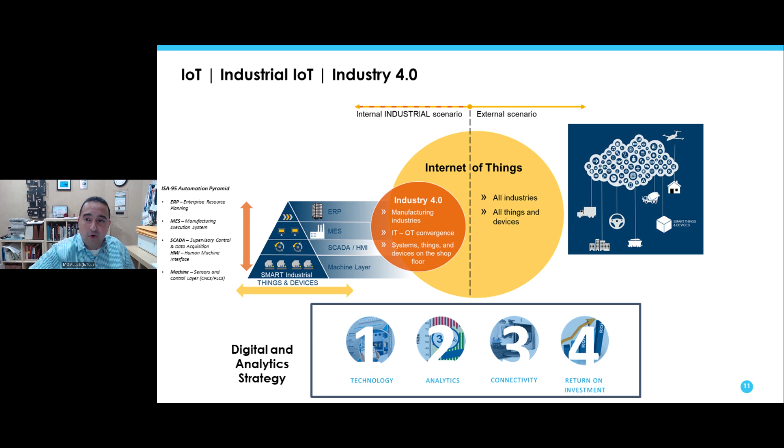And this all requires, number 3, connectivity. How do I capture real-time data, and how do I integrate data from the shop floor to the top floor of that pyramid, the automation pyramid that you see right there? And it all boils down to, what is the business case? One of the biggest challenges of implementing AI and predictive analytics, and to be honest, any IoT type of solution, is establishing a solid business case and delivering that business case in a short period of time. And therefore, I'd like to start setting the stage by talking about the business case.

The vision here is using those tools to drive toward a more zero downtime, near zero defects mode of manufacturing. So in order to do so, we have to define realistic KPIs, realistic key performance indicators. One of those key metrics used in manufacturing today is OEE, which is the overall equipment effectiveness of the plant. Some of the improvements you see here are actually manufacturing clients that have embraced Industry 4.0, embraced predictive analytics, and were able to make substantial improvements to their business. Clients are seeing improvements within a short period of time and achieving a very strong return on investment.

But if we look specifically at predictive maintenance right there in the middle, because that is a key use case we're going to discuss today, predictive maintenance is there to support organizations to move away from a fail and fix preventative mode of doing maintenance to a more predictive and prescriptive mode of doing maintenance.

And you can run predictive maintenance solutions as standalone solutions, or you can tie them with existing systems that you have in the plant. And two of those systems we're going to talk about today. One is production scheduling, and another one is your CMMS, or your maintenance system. And by tying them with production scheduling and maintenance systems, you're able to gain further improvements.

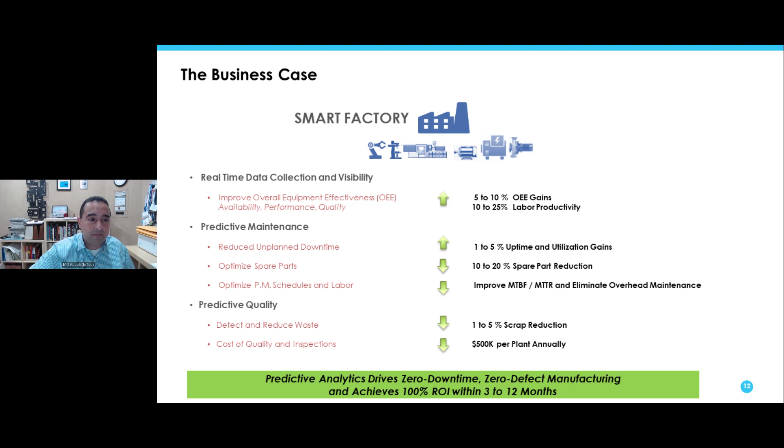And my colleague will go deeper in this area, but I want to show the high-level view of predictive analytics and the idea of having a worry-free process, a worry-free scheduling process for production, and a worry-free maintenance process for the maintenance organization. And it's really all about three layers. The first layer is data and connectivity. We need to capture the right data from the right source, and it has to be done in an affordable and reliable and scalable way.

Data can be coming from the machine controller. It can be coming from quality systems. It can be coming from your scheduling system, whether it's in the ERP or whether you're scheduling in your manufacturing execution system or your IoT platform. So we're going to talk about what data is required. We're going to talk about how the AI solution can be configured, and then how the data can be sent out to those third-party systems like scheduling and maintenance, so you can become more predictive.

And there's really three key metrics that predictive maintenance would empower the organization with. One is health. Is my machine healthy? Is my process healthy to continue running without unplanned downtime? Second is, what is a prediction of that remaining useful life? When is that machine or component going to fail before it fails? And what is that level of accuracy? Because that is my lead time to allow me to schedule maintenance and production planning in a proper way.

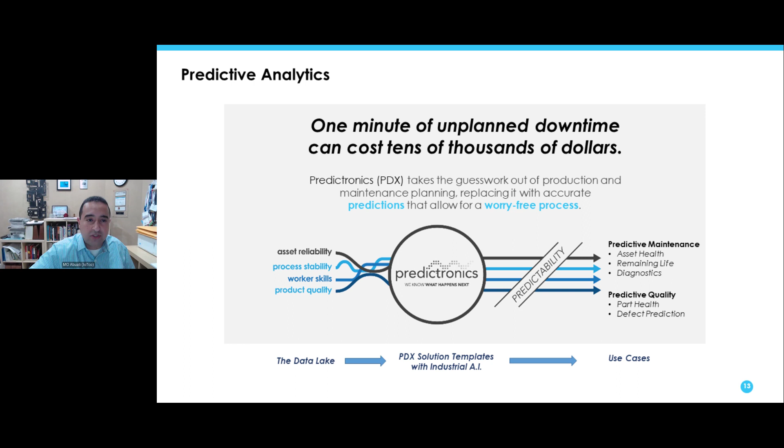And last but not least, what's a diagnostic, right? Which part of the machine is going to fail and what is the root cause of the failure, so I can maybe order a spare part at the right time, or even make a decision to order a different spare part for the machine. So a lot going on here, but really the idea behind predictive analytics as an enabler to Industry 4.0 is you need to capture the right data, you need to analyze the data in the right way using machine learning and advanced analytics, and then you need to have that user experience and that data sent to the solutions in order to schedule and plan in a predictive manner.

And therefore, there is a process behind it, and we're going to be referring back to this process throughout the presentation. First of all, there is data collected, number one, depending on the type of use case, the type of machine, the type of process. We refer to these as templates. Second is there are features, basically statistics, mathematics behind the scenes. Those features are indicative of what's happening in that process. So that raw data is basically transformed into features.

Those features in number three are training an AI model or a machine learning model, which is a subset of AI, in order to build a fingerprint or a signature of the condition of my machine or component, and then allowing this to become repeatable and scalable, number four, as well as predictive, delivering the health, the predictions and the required diagnostics so that the production planning, scheduling, as well as maintenance scheduling are really transformed continuously as in number five, as well as deployed and scaled quickly within the operation.

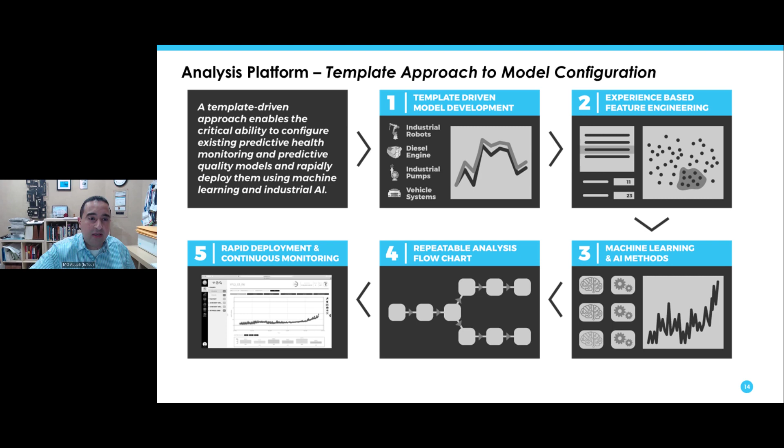So I hope this gave the team some understanding of the terminology as well as the idea behind what we are presenting today. And it's my pleasure to introduce Dr. Lapira to talk about the first use case, of how to use predictive systems to improve production scheduling. So welcome, Edzel.

For this section, I'll be focusing on the educational aspect of what you will learn, including predictive maintenance and predictive scheduling, and how they can be combined to drive real value for your business. I'll also talk about the digital journey, what data may be needed, what software you may already have or may have to add, what infrastructure may have to be put in place. And towards the end of my section, I will provide a brief illustration on how the system would work and some summary points on how you may get started.

So with predictive maintenance, you're looking at a more condition-based approach for performing maintenance. As an example, if you think about your car or vehicle that you drive every day, you may have to change oil every 3,000 miles or so, which is a more preventive maintenance or a time-based or a schedule-based approach.

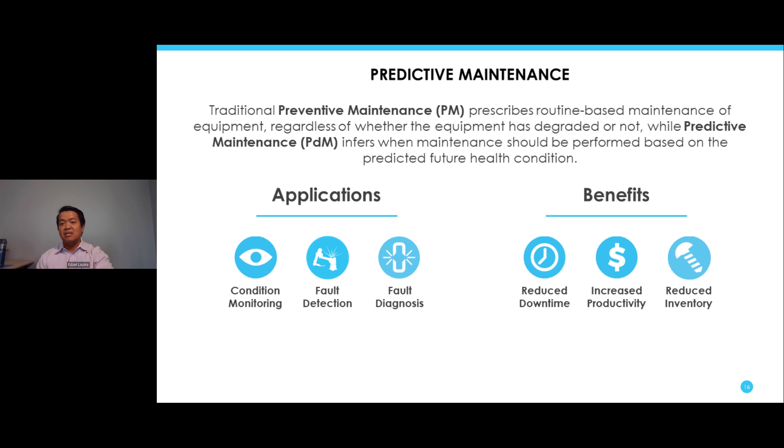What we're working towards with predictive maintenance is finding early indications that the machine may have some symptom that's starting to degrade, or early symptom of failure, and performing maintenance more based on the condition of the asset. That includes related technologies such as condition monitoring, detecting fault at an early stage, fault diagnosis, and a prediction of when it may fail. And that can be combined with scheduling, which I'll talk more about later. And if you make the right decision on when to perform maintenance, you can ultimately reduce downtime, increase productivity, and reduce the inventory for your operation.

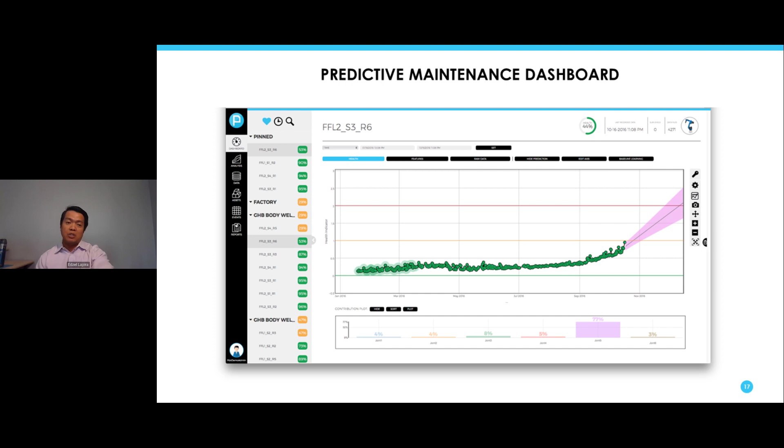And if you look at the bottom of the screen, it's also indicating that a particular part of a robot, in this case, joint or axis 5, was the main contributing component that was most severe. So this, again, is an example of a predictive maintenance solution dashboard. It consists of an assessment of the machine's health, a prediction of the future health condition, as well as an indication of where you should go and look to address this potential issue.

So how can predictive maintenance be combined with other existing systems? First, let's review some terminologies and applications that are already being used by various factories and organizations. First up, we have ERP, or Enterprise Resource Planning. And this is more for managing operation resources that go into making a part. Meanwhile, MES, or Manufacturing Execution System, is more focused on facilitating and automating manufacturing operation processes. It can also be a repository of various operation information.

So some of the data in MES would be the data inputs for doing predictive scheduling, because it contains information pertaining to the production jobs or orders that the machine has to accomplish. So it's very important to combine that data with health information generated by your predictive maintenance solution. Thus, integration would be a key enabler to go from predictive maintenance to predictive scheduling, which would ultimately drive better decisions and higher value.

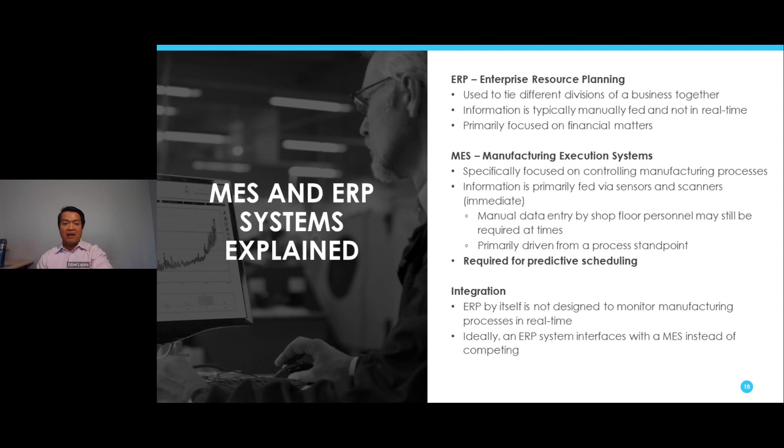So what could be achieved by combining a predictive maintenance solution with an MES system? There are various ways predictive maintenance capabilities can be enhanced by integrating with MES or third-party applications. And one of those is the production and maintenance integrated scheduling, which I'll talk more about later. In addition, MES solutions also provide a measure of overall equipment effectiveness, or OEE, for the machines that are being monitored. It would be interesting to correlate and have a unified dashboard to understand the OEE of the machine as well as the machine health.

Another one is integration with maintenance management system, which Mo will talk more about later. For example, a machine is degrading and we're predicting an issue will get worse in the next month or so. Maybe we want to schedule a certain maintenance activity through a work order to dispatch a colleague from the maintenance department to go check it.

So let's look at a potential framework for integrating a predictive maintenance solution in an MES application. So in this example, you can have any type of manufacturer. For the use case that I'll be describing later on, I'll be using a CNC machine as an example, but it can be any other type of asset or equipment.

Now, for this machine, as an example, we will be using a CNC, and with a CNC machine, we usually look at different components, right? We usually look at the spindle and the ball screw. But for this application, we are going to use machine parameters as well as sensor data. We can observe the changes over time and develop a predictive understanding of the machine's health, and that information can be related to the machine and component health, as well as corresponding diagnosis of the potential issues, as well as a prediction of when that component may fail.

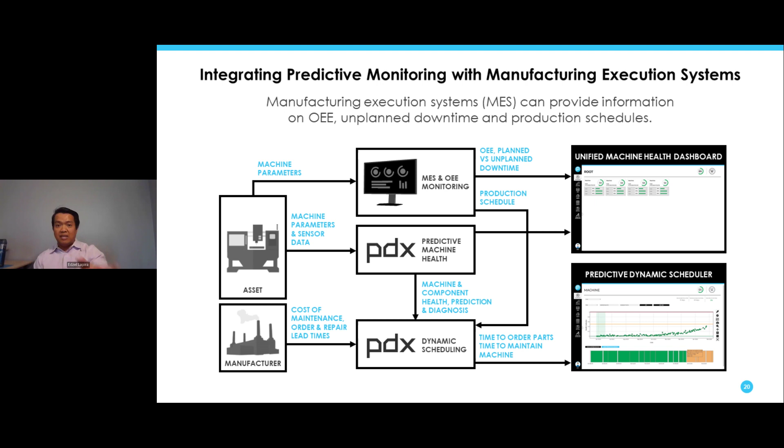So with predictive scheduling, what we're aiming for is to combine production information and maintenance information, as well as an estimate of the machine's health, to find that optimal time when to perform maintenance. And if you look at what really drives better decision-making, it's not only that there's a problem, but when you should act. That's an important aspect of why predictive scheduling is a value add to the existing predictive maintenance capability.

Now, in order to achieve predictive scheduling, one would need the following components. You definitely need to have a predictive health monitoring system in place. One would also need the production schedule from the MES, as well as the maintenance information. So with those systems in place, you can achieve the benefits of better decision-making, such as increased productivity, better maintenance scheduling optimization, and a reduction of spare parts.

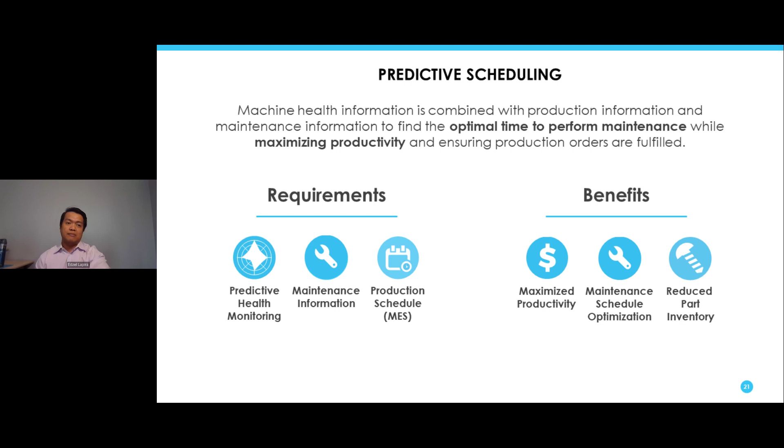Now, with those concepts in mind, this is an example of a screenshot of the combined health monitoring and predictive scheduling dashboard. It's showing the machine health that we had seen earlier from the existing predictive maintenance system. But if you look at the top right of the screen, it's showing more clear, actionable information, such as when to order parts and how much time until repair should ultimately be performed.

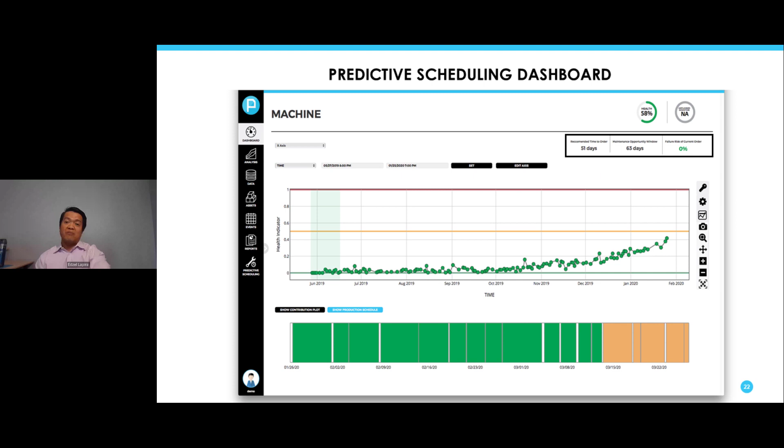At the bottom of the screen, it's also showing the upcoming production orders and the risk associated with performing that order, given the machine may stop mid-order. Green means that there's no or very little risk. Yellow means more moderate risk. And as the machine degrades more, it will turn red. So this can give you better actionable information on whether you can meet the next production order or not, or if you should be performing maintenance in between that time period.

So what value does predictive scheduling bring to the end user, and how could it make their job easier? Reviewing the existing products being combined in this topic, with MES, you're looking at shop floor management and OEE monitoring. What that provides as a standalone application would be better visibility, among many other benefits. For predictive health monitoring, you're looking at machine health, finding early symptoms that something is going wrong, as well as diagnosing those problems. With that in place, you can reduce unplanned downtime.

But with the two combined together, you can still benefit from the existing functionality that both already have, but you can add the benefit from the integrated system, which includes optimal scheduling for doing maintenance, as well as a unified dashboard that allows one to correlate OEE and machine health together. Now, we spoke to some of our customers, and some of the improvements we've seen include a reduction in downtime, as well as an improvement in OEE. The values may vary depending on the type of industry, as well as other factors.

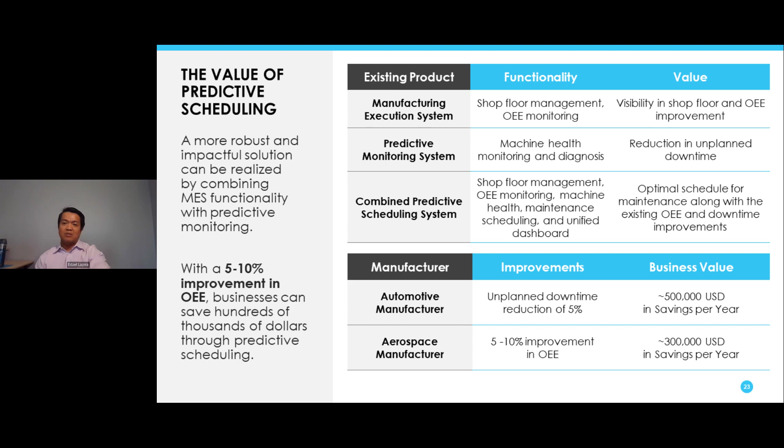Now, looking at a specific application for predictive maintenance, let's look at the CNC machine use case, which is a popular template for us. Now, there are usually a set of common critical components that we focus on. A popular one is spindle bearing. The focus for spindle would be the front and rear bearings, and we're looking at the data from add-on sensors such as vibration. Usually, we have an accelerometer placed on the spindle housing.

But we also get data from the machine controller via various protocols, either using OPC UA, MTConnect protocol, what have you. And the controller data would be more contextual, like the spindle rotation speed or RPM, the spindle load, as well as the program number. Those would be good contextual information in understanding the health of the spindle bearings.

In a similar manner, the other key component that I'll be focusing on today is the linear ball screw. And the common failure modes with the ball screw are usually a preload loss, lubrication issue, and other issues like wear in the ball nut and so on. With the ball screw, it's very challenging to install add-on sensors.

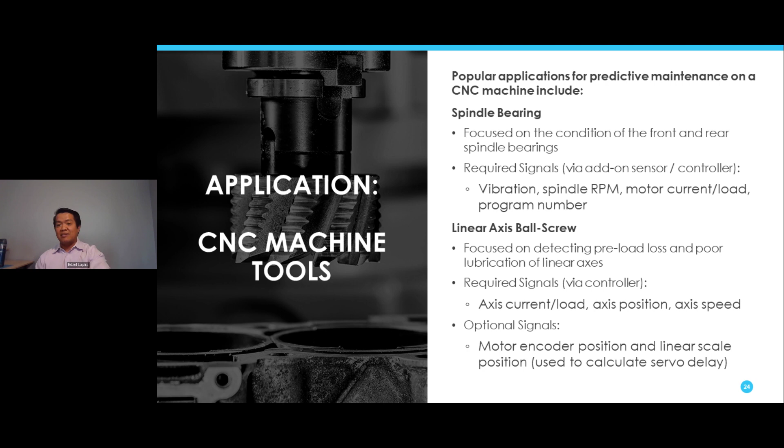Furthermore, based on our experience, the data from the controller is usually sufficient to build the health monitoring models for the ball screw. In this case, we use actual load, position, speed, and the corresponding commanded values for those parameters. These signals, based on experience, have been insightful for building the predictive maintenance model in understanding the health of the linear axis or ball screw.

So with those concepts in mind, we went ahead and demonstrated this integration through a project funded by MXD organization. They are focused on digital initiatives in manufacturing, and they are looking at technology to demonstrate it. And it's really a good collaboration. We had a university partner. We also have an MES software vendor as a partner. We, the maintenance solution provider. And then finally, we have an aerospace manufacturer as the end user, which provided the factory data.

Now, this collaboration was focused on developing the capability as well as demonstrating it in an actual factory setting and deploying the solution and then receiving feedback from the end user. In this case, the solution included both the unified dashboard as well as the dynamic scheduling, and it was applied to a CNC use case, around 4 units. And the impact is that it's able to affect how they schedule maintenance and ultimately it improved equipment availability for them. So there's definitely more that can be done, but it's a good first step in proving out the integrated solution.

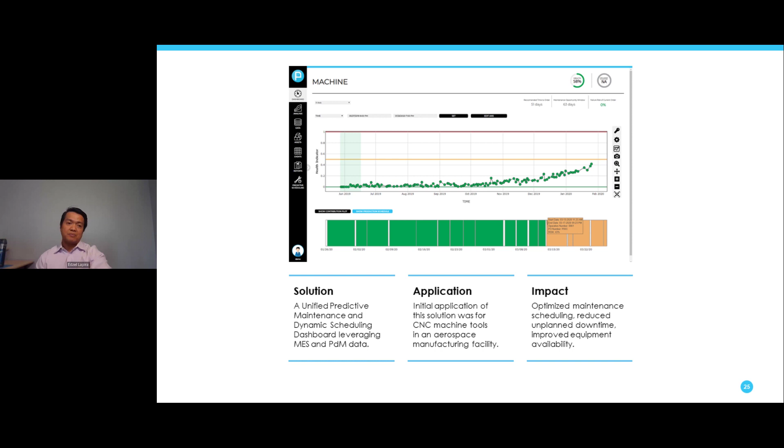So diving a bit deeper, this is one of the tabs in the unified dashboard. It allows the end user to input some parameters for each component. These parameters are utilized to find the optimal time to do maintenance and order spare parts for these components. These parameters include spare parts inventory cost, the downtime cost per day, overall maintenance cost, shipping cost, and delivery lead time.

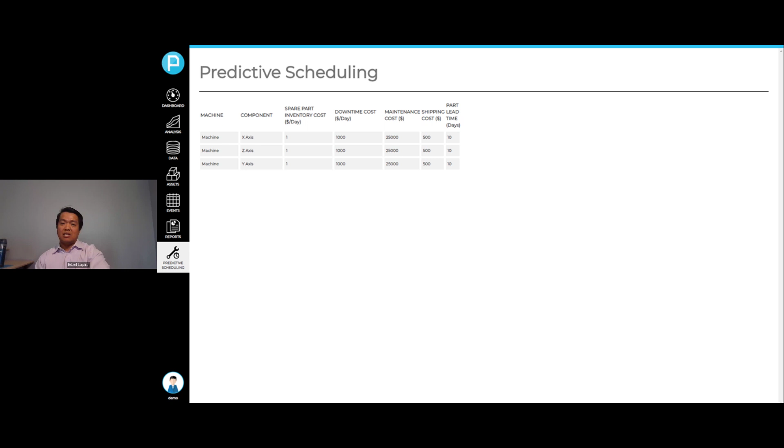Now, the following slides that I'll show you will illustrate a time lapse on the simulated data to demonstrate how the integrated maintenance and scheduling system works. So this is how the dashboard looks in the early stages of the component's life when it's still healthy. If you notice the top right portion, there's no prediction yet since there's no trend. There's nothing to base our prediction on, and everything is still healthy.

Now, once the system detects a trend as the machine is run further, then it makes a prediction. In this case, it's saying that there's a total of 63 days to perform maintenance and 51 days to order the replacement part. The difference of the two allows for the delivery and installation of the part, including the commissioning of the machine.

Now, this is what the dashboard would look like if the machine is allowed to run further without any intervention or maintenance action. As you can see, you're at a high risk in completing any of these orders, and it's saying that maintenance needs to be performed immediately if the machine hasn't failed yet.

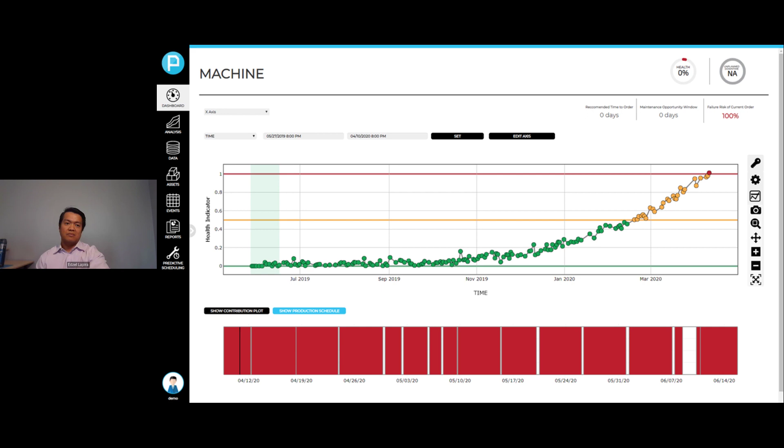So as a summary, here's the sample data list that we would need if we were to set up a predictive maintenance solution for CNC machines, and we're interested in spindle bearing and linear axis or ball screw related events. You would need a different set of data parameters should your priority be another asset or equipment.

For spindle, the vibration signal is a major requirement. This can be measured with an accelerometer. Other signals we would need would be spindle load, spindle rotation speed, and the program ID as contextual information. Meanwhile, for linear axis or ball screw, we would need controller data only, such as the actual axis position, speed, load, and the corresponding commanded values for those parameters.

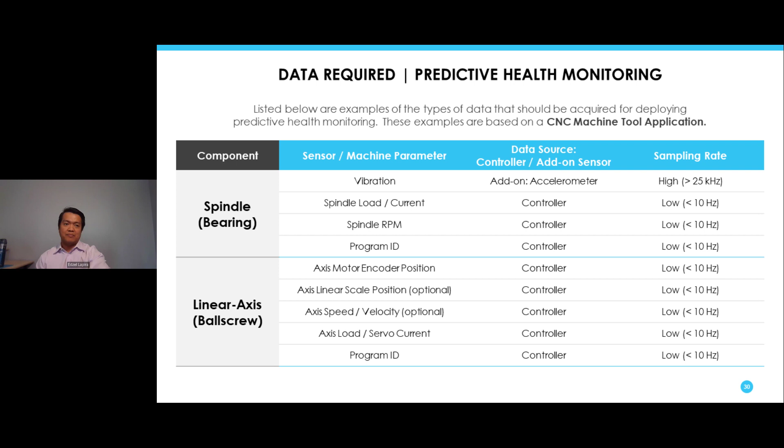Meanwhile, for the predictive scheduling piece, we would need the following information. I've divided them into two categories. We have the dynamic data that would come from the MES application. This would include the production schedule, so the start and end timestamps or dates for those scheduled orders, operation number, purchase order number, and the data can be continuously retrieved via APIs, so the schedule can be updated regularly.

Meanwhile, there is also some static information, and some of this can be retrieved from ERP. So we would need this information to calculate how long until parts come in when they're ordered and the associated costs. So with that, I'll pass it back to Mo for the rest of the presentation.

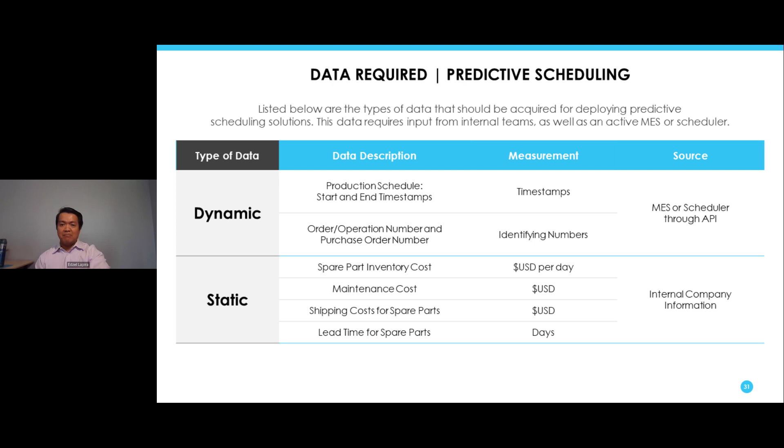Edzel, thank you so much. I think it's an important use case of how predictive analytics can not just help maintenance, but also help the production scheduler ensure continued production in the plant. I do want to talk about a second use case, which is tying predictive solutions to your CMMS system. And CMMS stands for Computerized Maintenance Management System.

So some examples of CMMS systems, sometimes referred to as EAM, Enterprise Asset Management Systems, include systems like SAP PM and IBM Maximo and many others. In many cases, the ERP system itself may have a maintenance function or a maintenance module. And in other cases, it could be a third-party maintenance tool, or it could be part of the MES system.

So whatever CMMS you use, it is important to understand that you can run predictive maintenance solutions as a standalone solution. In this case, they'll be capturing data from the asset, such as the CNC machines that Edzel was showing, and the ball screw and the spindles. You can also capture add-on sensory data like vibration that Edzel showed. And obviously, having this link from the asset to the predictive system provides you a machine health dashboard and predictive insights into future failures.

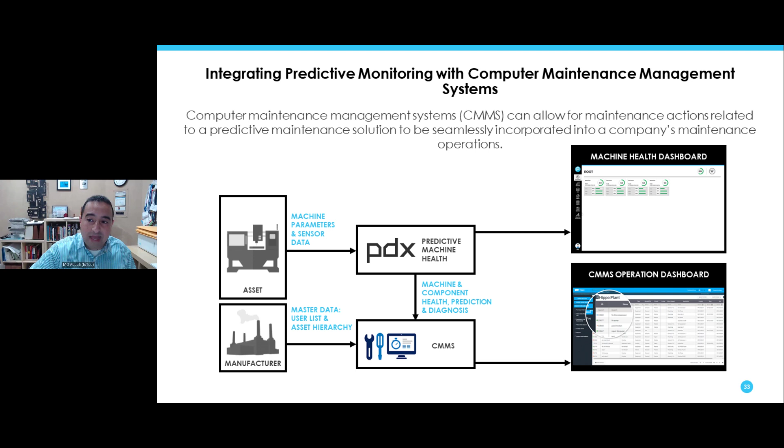To show you a little bit of the detail, and it's a busy slide, I want to summarize it by saying there's usually two API interfaces between a predictive system and your maintenance software. And API stands for Application Programming Interface. So it's an interface, and there's different types of interfaces. There is a REST API. There are XML-based integrations. There is JSON. There is MQTT, which was a previous webinar we did with CFE on how to leverage the broker messenger of MQTT. So these are all examples of interfaces.

So whatever your interface is, you have to check with your maintenance software provider and see what interface they support. But the first API integrates the master data between the predictive software and the maintenance software. So there's a handshake to understand what are the machines, what's the asset hierarchy, and things of that sort. And then the second API is the one that actually takes that predictive health value and prediction and does the creation and auto generation of that work order request.

Okay, so there is basically a master data handshaking API back and forth, and then the second API is the one that, based on rules and predicting when the machine is going to fail, would then auto generate the work order in your maintenance system. So I'm just simplifying what's on the slide here.

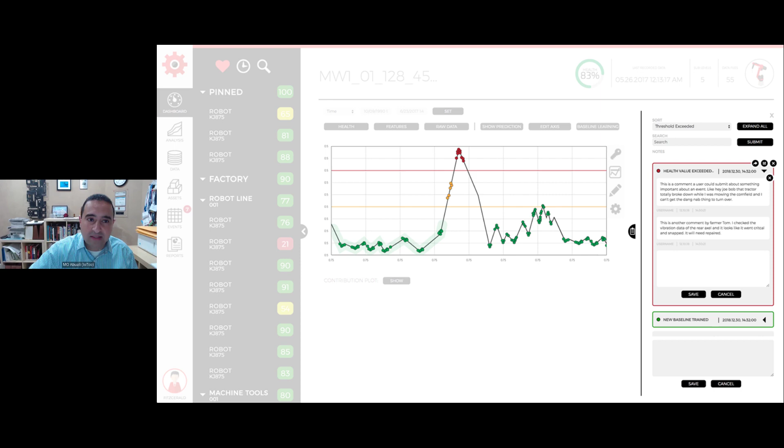And a quick example of a maintenance dashboard from a predictive system is shown here. What you're seeing is the health value is rising, and there is a predicted failure that's going to happen on this machine in the short term. And therefore, a pop-up would enable the maintenance organization to also input additional comments if required. They will be able to save that comment, as well as request a work order to be automatically generated from your predictive tool to the maintenance software.

Okay, and it's important to understand here some of the information that is coming back and forth from the API. So as I had mentioned, there is some master data that is coming back and forth, such as the asset description, location, and so on. And then there is information that your predictive software can send out.

So for example, who is requesting the work order? So John Smith is logged in right now. He's the maintenance person, for example. And what type of request definition? And do you want to input comments?

And then most importantly, the predictive system identifies that there is a specific failure, and it identifies a diagnostic, for example, joint 5, okay? And it can also identify a detection and prediction window, and that allows the maintenance system to receive this auto-generated work order.